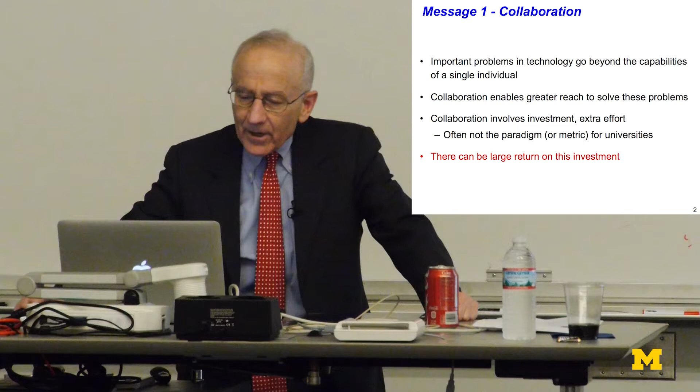So my first message is really about collaboration. Important problems, especially important problems in technology, often go beyond the capabilities of a single individual. So how do you solve these? Well, collaboration. So greater reach, but it's also extra effort, extra overhead. And it's often not the paradigm for universities. You think about monks toiling in their cells, writing individual papers. But even so, there can be a large return on this investment. So that's one message. I'll give you another one.

So who am I and why am I here? Well, I'm a technical person, and if you look at the bottom of these things, there's some equations to prove it. This is obligatory. So here's the Gibbs equation, and it's about enthalpy and entropy. Enthalpy is how much work you do. Entropy is how efficiently you do it. So what does a propulsion engineer or power engineer care about? Both those things. And also vorticity, property of rotation of a fluid, and turbomachines, gas turbine engines, the flows are full of vorticity. So I'm a technical person, but I have some exposure to the organizational literature.

I have, as Dan said, experience in industry and academia, so I've seen it from both sides. I've also had some experiences with failures in collaboration. Not that the technical work wasn't good, but the whole wasn't greater than the sum of the parts. So I've looked at identification of best practices for university-industry collaboration. So that's another theme of my career. Collaboration's been a major part. The mantra, I think, is the whole being greater than the sum of the parts.

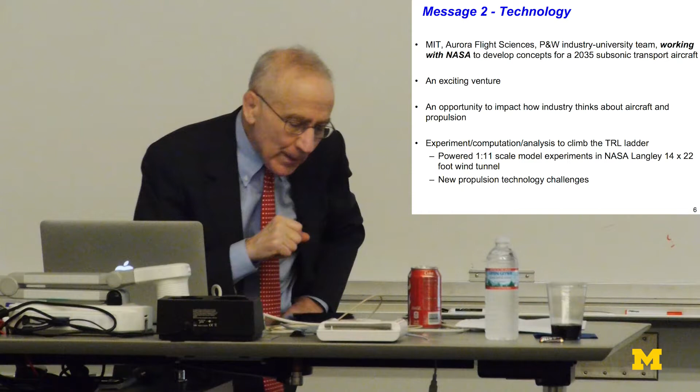And so what I'll tell you about is experiments and computations to climb up the TRL. The TRL stands for technology readiness level. It's how mature the technology is. How are we doing in climbing up that ladder? And also the idea that if you talk about new configurations, new vehicles, new aircraft paradigms, you tend to get new problems to work on, which is also an exciting thing. Okay, so there's the three logos.

Here we are. And what do universities do? Well, they look at concepts, they educate. Industry, you can see aircraft and engine design and development, and they bring to the table product knowledge, things that universities really don't have.

So this is talking about collaboration not only within organizations, but also across organizations. So you can see the numbers here, 30 people, 25 people, and we're now in the third phase of this, so maybe 8 to 10 people so far, among whom are people from the University of Michigan. And I would say that the program is driven by ideas and technical discussions. So it's the primacy of ideas. So it's what's being said rather than who said it. And we're trying to change these legacy beliefs.

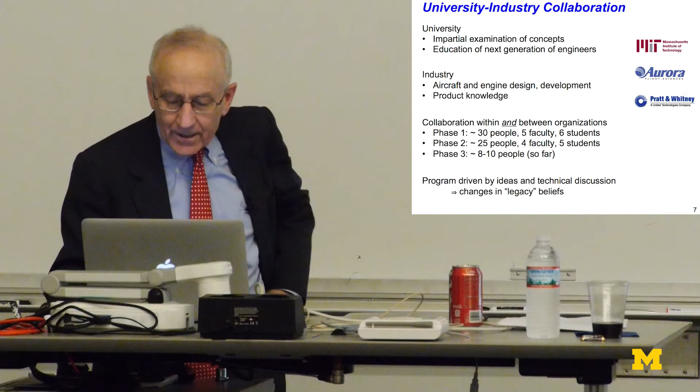Okay, so let me talk a little bit to set the context about the NASA N+3 program. N+3 is generations of air vehicles. So N+1 is the next generation, 10 years. N+2 is maybe 20 years, 25 years. N+3 is further than that. So we're supposed to identify not only the airframes, but airframes and propulsion concepts. What does the air vehicle look like in 2035?

So we started out trying to do this in a strategic way, looking first at the scenarios. What might the scenarios be? So the people at MIT who do that, we banded together with them. Then looking at this, advanced airframe and propulsion concepts and the technology needs. So here's the NASA technology goals. And these technology goals, if you see these NASA slides, they'll have changed. But this was the original back in maybe 2007, something like that. This was our marching orders back then.

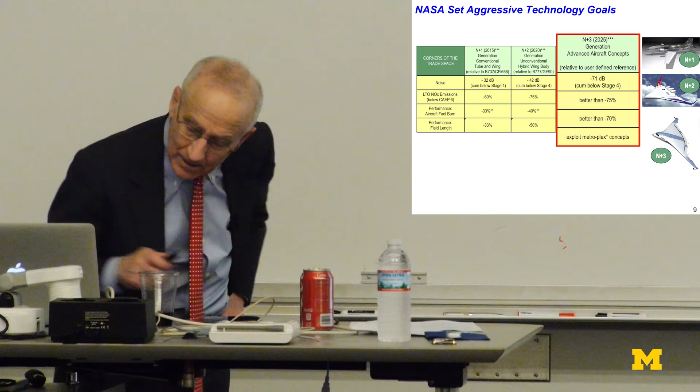NASA said, here are the technology goals. And look at the fuel burn, because that's what I'll focus on. So 70% change in fuel burn. So what that means is basically that's not much more than just flying the fuselage alone. So if you can do that, that's a substantial accomplishment. And here's the NASA charts of what the N+1 is, forward swept wings. That's supposed to be 2015.

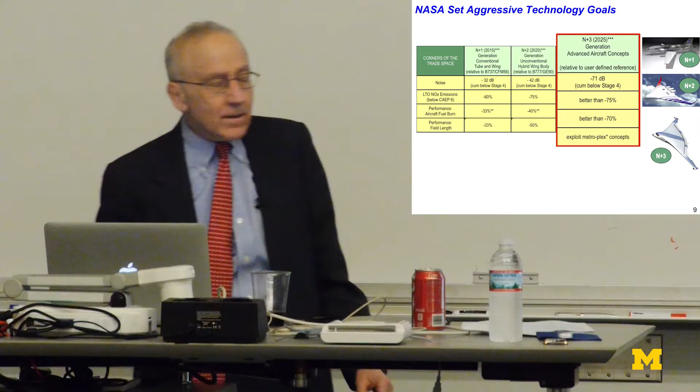Well, 2015, events have overtaken us on that. This is 2020. People are now talking about flight demonstrators for this. Boeing has run their own flight demonstrator. And maybe here's N+3. But ours, well, you'll see what our configuration looks like. But basically, these are stretch goals. And how stretched are they? This is as of 2010.

So let's look at this. Here's the world's data, and here's the NASA goal here. And to give the story away, here's where we, at least conceptually, here's where we think we reach. So how did we get there? What did we do? And where are we going? That's what I'll try to answer.

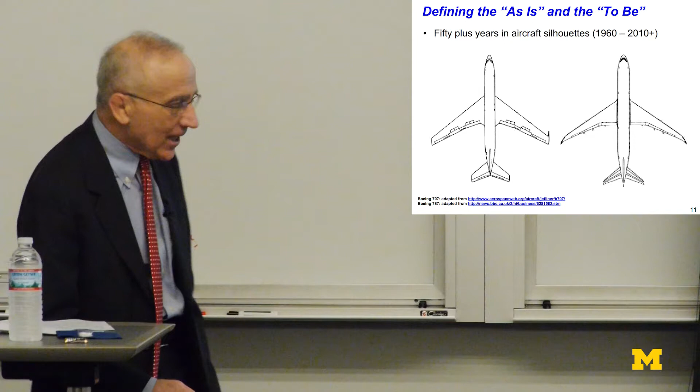Okay, so here's trying to differentiate the as-is and the to-be. Engineers tend not to talk about the as-is. You ask them, how do you do something now? And they don't want to tell you about that. They say, I could do it much better, though, if you would allow me to do this or that. So this is the as-is. So one of these is a 707. One of these is a 787. I'm not going to tell you which. But basically, my eyesight is failing at my age, and I can't really tell the difference between the two.

So this is 50 years plus now. And if we look at this in another 10 years, it's not going to be greatly different. So not much change in aircraft, a lot of change in engines. So we looked at this in our phase one. And what were the major results? Well, we came out with these conceptual designs. I showed you the performance of the design. And this tube and wing configuration with double bubble fuselage.

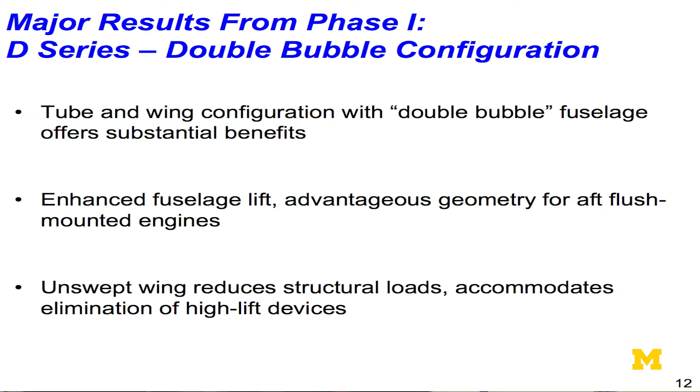Why is it called a double bubble fuselage? Well, I'll show you it's wider, but the fuselage looks like two tubes, so double bubble. It has enhanced lift, and it has advantageous geometry for putting the engines on top and in the back. And that allows you to take in some of the fuselage boundary layer. That gives a propulsion benefit. So that's a real plus. And then you don't have to sweep the wings. We fly a little bit slower, so that also gives you a plus.

So here's what it looks like. Double bubble. You see that here's the two bubbles here. So here's what the aircraft looks like. Here's what it looks like from on top. There's the seating layout. Here's what it looks like in the back. So here are the engines, the two engines. And so the flow goes over the aircraft. That's the whole run of the fuselage boundary layer.

So it's a thick boundary layer. And about 40% goes into the engines.

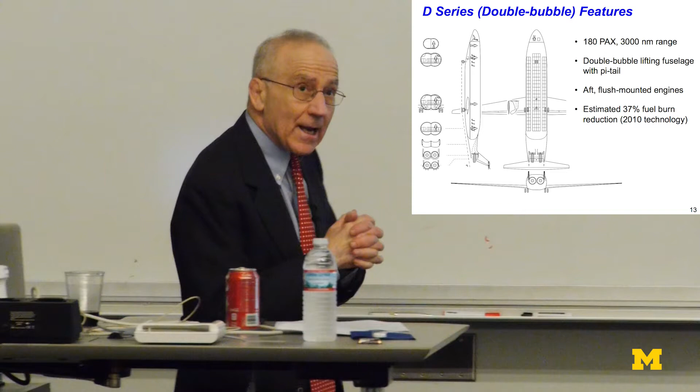For this study, we looked at a number of different variations. One is with 2035 technology. One is allowing the wings, or allowing the aspect ratio, to be as large as aerodynamically desired. That doesn't fit in the gate, so you have to say no, we can't do that because the existing infrastructure won't allow that. So this is with the constraints of existing infrastructure and with 2010 technology.

So this was our phase one. Here's what it looks like compared to a 737.

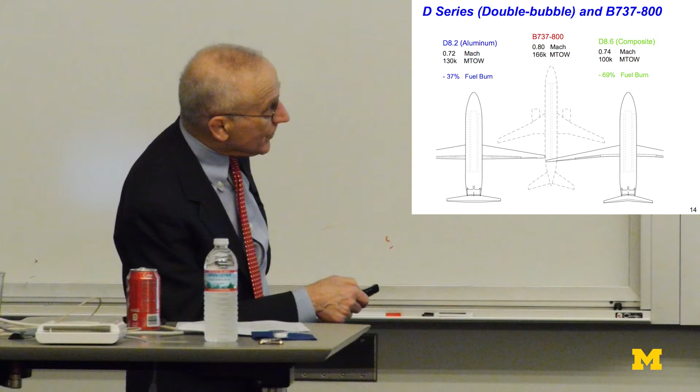So this is the super duper version. Perhaps it's composites, has a much larger wingspan. Takeoff gross weight is less. And this came out to have a 69% fuel burn. The aluminum version flies slow, has a smaller takeoff weight than the 737, and was a 37% fuel burn. But you can see the relative sizes of the 737, or the A320 if that's your preference, and the aircraft we're talking about here.

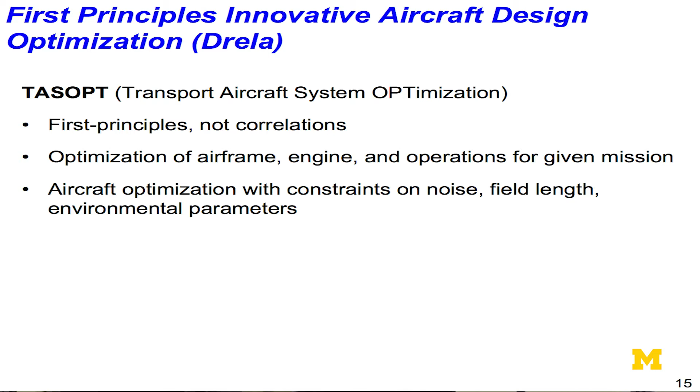And I just have to give my colleague Mark Drela credit, because this wouldn't have been possible without this first principles aircraft design procedure that he put together. It's first principles, so it doesn't rely on correlations, so you can look at new and different, even innovative aircraft, and it allows you to optimize all these things together—airframe, engine, and operations—for a given mission. And then you could put these constraints on.

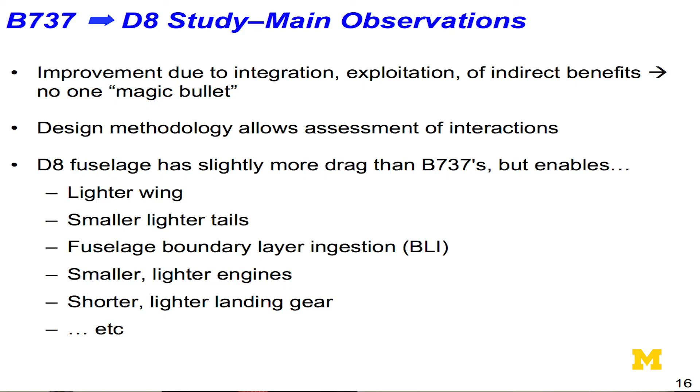So that was sort of the background of it. So our main observations from this phase one are as follows. First of all, what are the improvements due to? Well, there's no silver bullet. You can't say, well, I'll twist the wing a little bit here and I'll get 30% magically. It's like sort of compound interest.

So if you look at this, the fuselage is slightly more drag, but lighter wing. Small wing, the fuselage has more lift, so the wing can be lighter, smaller, lighter tails. Fuselage boundary layer ingestion, taking in the fuselage boundary layer, smaller, lighter engines, etc. It's like compound interest, okay.

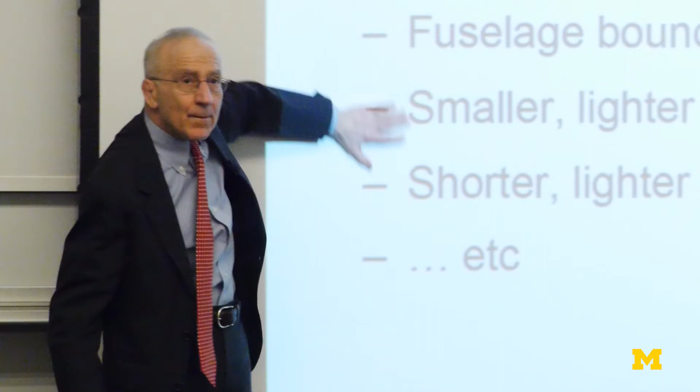And here's another way of saying that. This is a complicated chart, but what it's talking about is this is goodness—goodness on point of noise, fuel burn, field length, whatever it is. To the right is noise. And these are change in configuration, and this is all the advanced technologies.

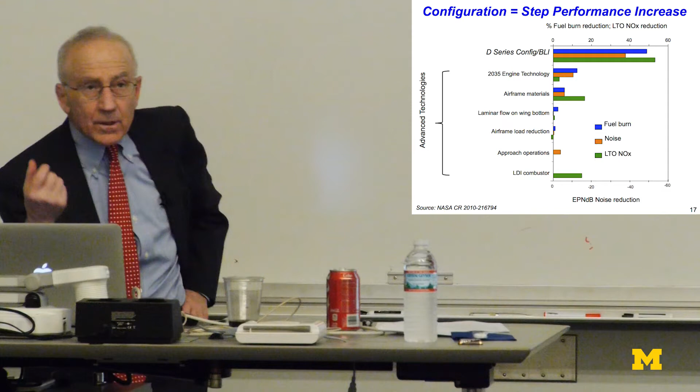So what you see here is, where do the benefits come from? Well, the overwhelming part of the benefits is from configuration change. Yes, you go to 2035 engines. Yes, you go to different types of fuselages, airframe load reduction, etc., different types of combustors. But all those things are much less, even added together, than the configuration change. So that's what I'll be talking about—the configuration change. So that was our phase one.

Phase two, we said, hey, we have this aircraft that ingests boundary layers. People haven't done that for civil aircraft. That's a major issue. So this integration of the airframe and the propulsion system, that's the major unknown. So our phase two, a lot of phase two was focused on that.

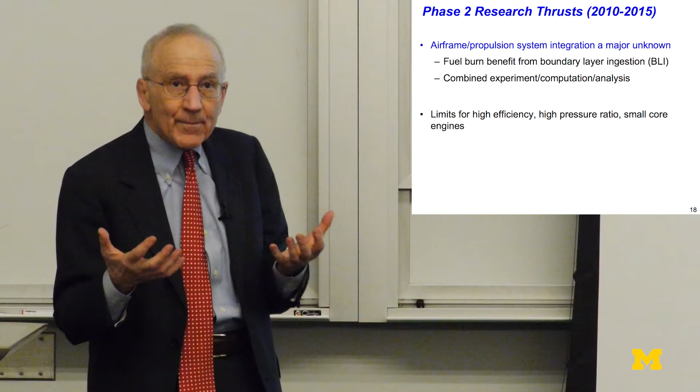What's the fuel burn benefit from boundary layer ingestion? I mean, we could do all the cycle calculations, but if in actuality there are some complicated fluid dynamic effects that debit the benefit, it's not a good idea. So we needed to look at that.

And along with that, we worked with Pratt & Whitney very closely on high efficiency, high pressure ratio, small core engines. Small, that means engines with small gas generators, small compressors, turbines, and combustors that will fit within these new types of aircraft. Let me talk a little bit about this boundary layer ingestion.

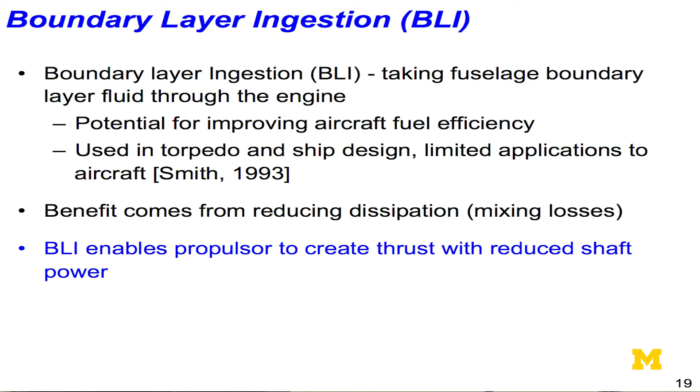So it's the fuselage boundary layer. It's the slow-moving fluid being reduced by viscous effects in the boundary layer. And you take the boundary layer fluid through the engine. So it has the potential for improving aircraft fuel efficiency. And it's been used in torpedoes and ships.

Ship propellers operate in the wake, or in the boundary layer, of the hull. And what does it do? Well, it just enables the propulsor to create the thrust, basically to propel the vehicle with reduced shaft power. So that's the benefit. So how does it actually work?

So think about two different aircraft. One of them has the nacelles and the engine underneath the wing. So what you do is you create a wake, or draft here, a low velocity region. That has to mix out, or that mixes out to the free stream conditions.

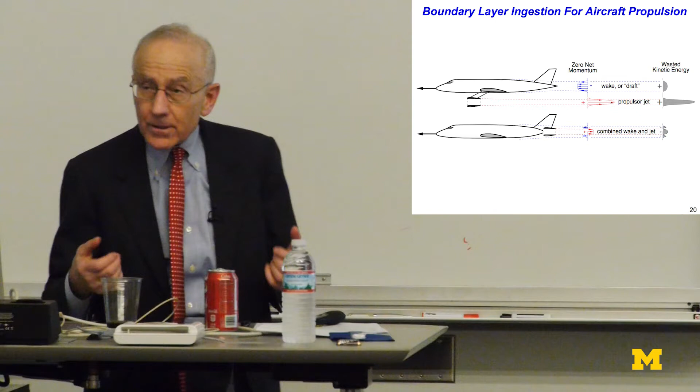Now, what I showed you is a picture of the fuselage boundary layer going through the engines. So you have a situation in which it's difficult to break things up into thrust and drag. Thrust is Pratt & Whitney, drag is Boeing, or drag is Airbus. But it's difficult because the fuselage boundary layer goes through the engine, so it's hard to draw the aerodynamic interference plane. Thrust and drag are ambiguous for these kinds of integrated configurations.

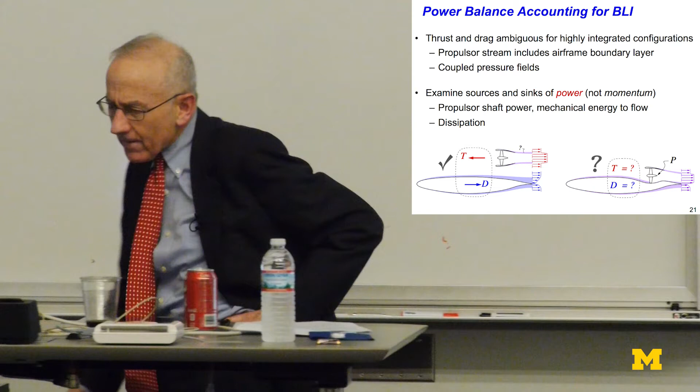And you can see the reason here: the propulsor stream includes the airframe boundary layer. You also have coupled pressure fields from the propulsor and from the airframe. You have those in the conventional case too, but it's much stronger now. So it's hard to make the separation. You have to assume various things.

So instead of working on thrust and drag, instead of working on forces, we now work on sources and sinks of power—again, enthalpy and entropy, sources and sinks of power. Think about the propulsor shaft power, the mechanical energy you have to put into the flow, and the dissipation.

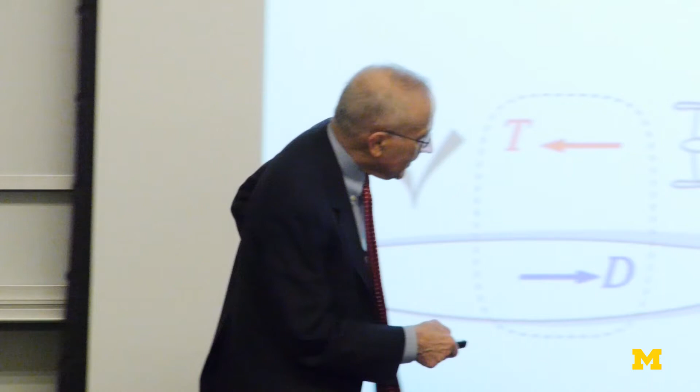So again, conceptually: here, check, we understand thrust, we understand drag. Here, it's difficult to separate thrust from drag, because the force on this is changed by the presence of that, and the behavior of that is changed by the presence of this.

So how do we do that? Well, you work directly with power.

So having said all that, one of the things you have to worry about is that now you have a non-uniform flow. You have the inlet, it looks like this: low velocity on the bottom, free stream velocity on the top. So at design point, at cruise point, you're always in a non-uniform flow.

So the question that comes up immediately is, what about the aeromechanical limits? Forced response, perhaps flutter. What about the decreased fan efficiency? All the things people have had to worry about before with distortion, but they only worried about that at off-design conditions. Now it's with you the whole flight.

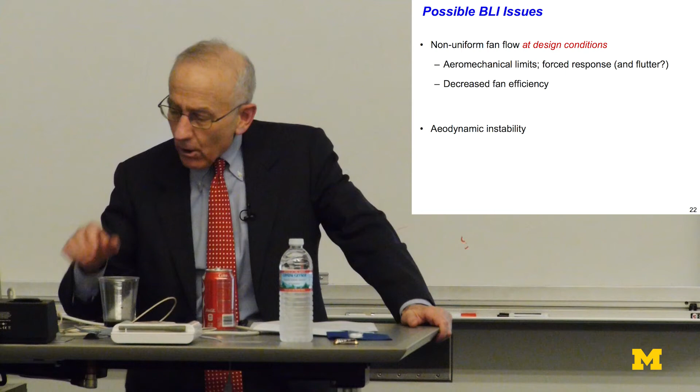Second one is aerodynamic instability here—does it get any worse with this? Well, those are real issues.

So I'm going to talk about the wind tunnel experiments that we carried out. I need to show you this evolution of the wind tunnel experiment. So, the first picture...

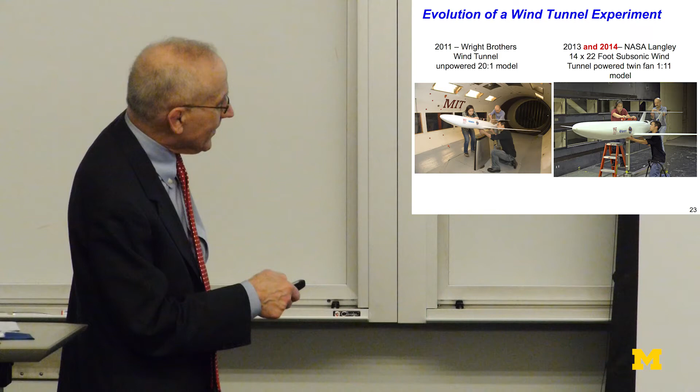I'm sorry to the students who came to talk with me at lunch, this is the same slide I showed them—but here's two students and Professor Drela. This is in the MIT wind tunnel, and here's a 1/20th unpowered model, just a model without any engines. Here's Nina, Michael, and Professor Drela in 2011, then 2013, and again in 2014 we went to one of the national facilities, NASA Langley's 14 by 22-foot tunnel, and here are the same guys.

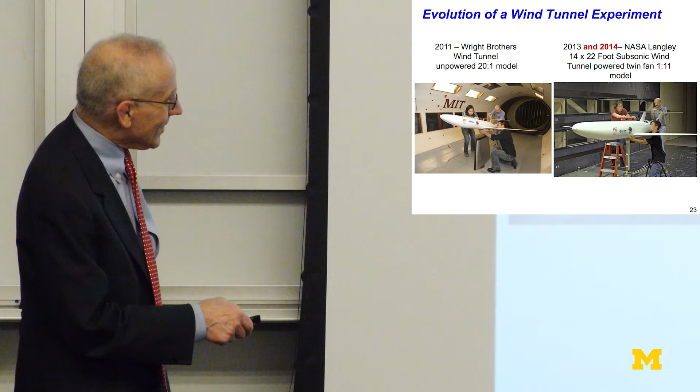When this photo was taken, we didn't set it up, especially didn't pick the day—it just happened to be the day the NASA photographers were around. But you'll notice, and I'll deny I said this, Professor Drela seems to have the same outfit on, Michael Lieu seems to have the same outfit on. Nina, of course, is sartorially correct.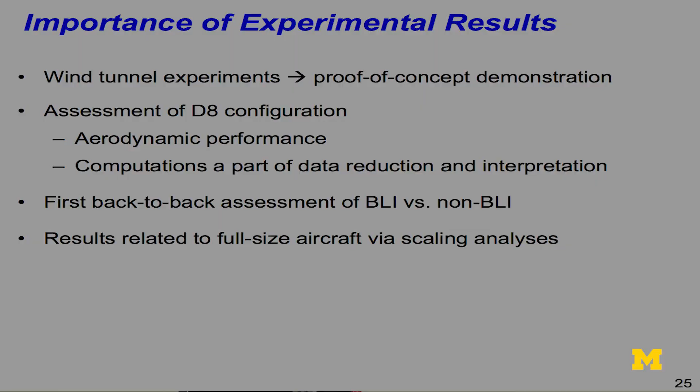So aerodynamic performance, and to do this, the computations which were done in collaboration with NASA Ames were an important part of this. So it's a back-to-back assessment of boundary layer ingestion versus non-boundary layer ingestion. That's what this is about.

It's a boundary layer ingestion experiment, and we can relate the results to full scale using scaling analysis. So we did this at a low Mach number. Now the real thing's going to fly at a transonic Mach number, 0.72, 0.74. But the boundary layer ingestion itself is not Mach number sensitive. The benefit is an improvement in something called the propulsive efficiency.

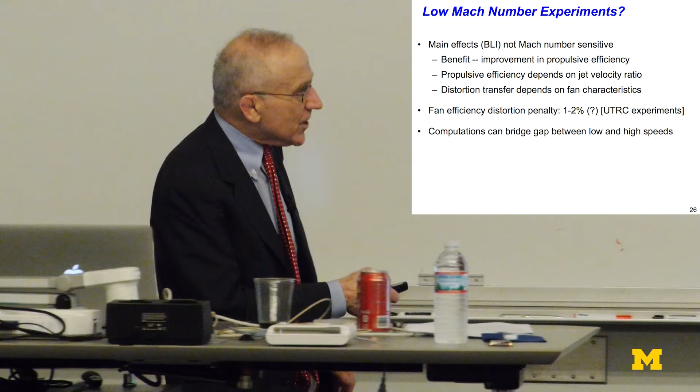And again, that's about less exit kinetic energy dumped into the air. It's not a Mach number sensitive thing. It depends on the jet velocity ratio, the jet velocity. This depends on what the fan characteristics look like, the fan slope of pressure rise versus flow. And neither of those things are very Mach number dependent.

And yes, there's a distortion penalty, but the measurements that have been taken so far show that maybe it's 1 to 2%. So if we gain 6, 7, 8, 10% by boundary layer ingestion, even though we might take a hit in fan efficiency, and I don't believe we have to if we design our fans properly, we're still ahead.

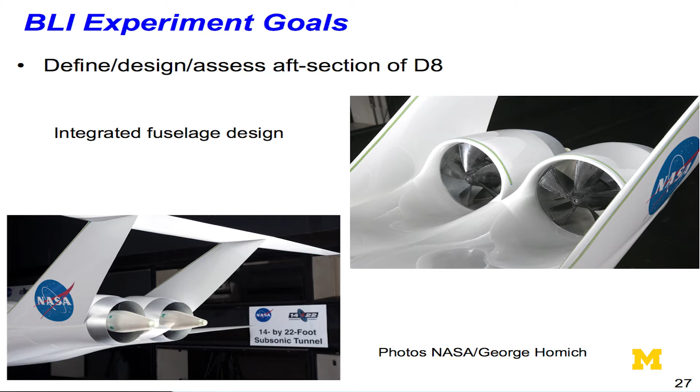Okay, so we're trying to assess—we developed this back end with an integrated fuselage. So you see here are the inlets. The fuselage blends into that. Here's what it looks like from the back. This is as installed in the tunnel.

And what we're trying to do, again, back to what our overall goals were: quantify the aerodynamic behavior of the boundary layers, develop a methodology which didn't really exist. How do you assess the benefit of an aircraft with boundary layer ingestion? How do you do the comparison? Do you do it at constant engine area? Do you do it at constant mass flow? Do you do it at constant exit velocity? So thinking about that in a rigorous way was also an important part of this task.

And what we're then trying to do is to define—okay, we do this conceptually, we say yes, there's a benefit. What are the steps maybe on the way to a flight demonstrator? Something like that. Again, it's moving up the technology readiness ladder.

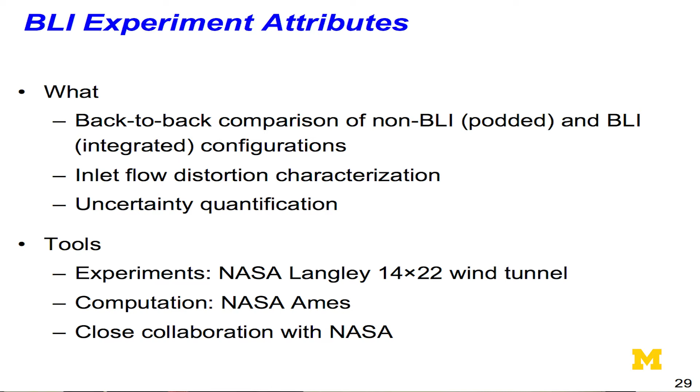So back-to-back comparison of boundary layer and non-boundary layer ingestion—I'm just saying it over and over again because that was really uppermost in our thoughts. That's the first thing: inlet flow distortion. What comes into the inlet? What do you have to be worried about in this type of configuration? And also, uncertainty quantification. I'll talk to you about that.

And so experiments, computation, and it was very close collaboration with NASA. It was a real pleasure to work in the NASA Langley tunnel. The people were just excellent. The facility was excellent. There was a really great spirit of teaming.

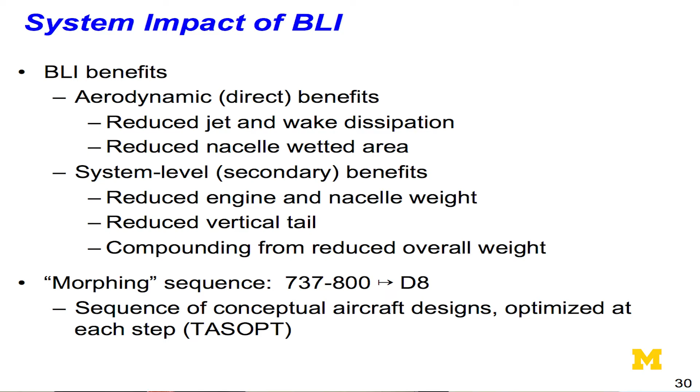Okay, now I've been talking up to now about the aerodynamic benefits. But there are also system benefits. You can say the aerodynamic benefits are direct benefit—here's what I measure: propulsive efficiency, things that you talk about in an undergraduate course on propulsion. So those are the aerodynamic things. Jet and wake dissipation, maybe the nacelles are only half nacelles, so you have reduced area.

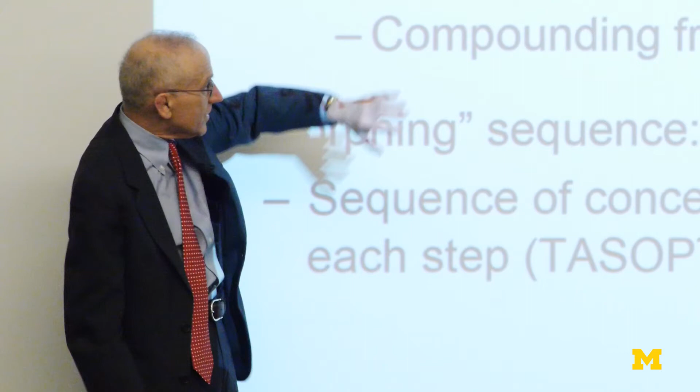But there are also secondary benefits. Maybe you don't need a pylon because the engines are now mounted on the fuselage. They're very close to the vertical tail, and again, reduced weight.

So I'll show you what that looks like—at least I would show you if this thing didn't keep coming back—in a morphing sequence. And in this morphing sequence, we'll use this TASOPT program, which optimizes aircraft to go in steps from a 737 to one of these D8 configurations.

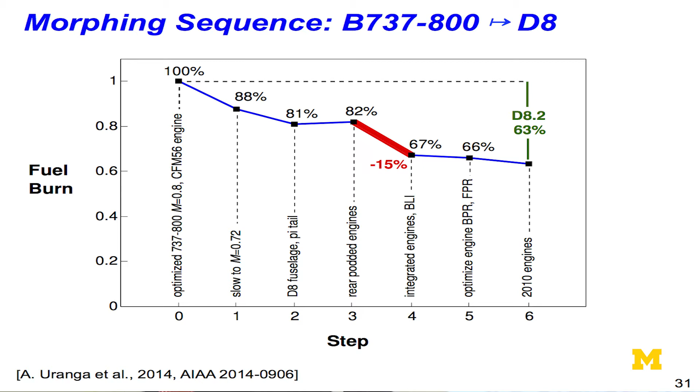So here's what it looks like, and this is fuel burn. So here's a 737, Mach 0.8, with a CFM56 engine. That's the engine that's on all those aircraft. And then you slow it down. You go to here.

You have the D8 design with a pi tail. The engine's still underneath the wing. Then you have rear-podded engines here. The engines are now on the fuselage, on the sides of the fuselage. And then you do the

podded engines. Now you do the boundary layer ingestion. That's the step we're talking about. So 15%. And then you do a couple more things.

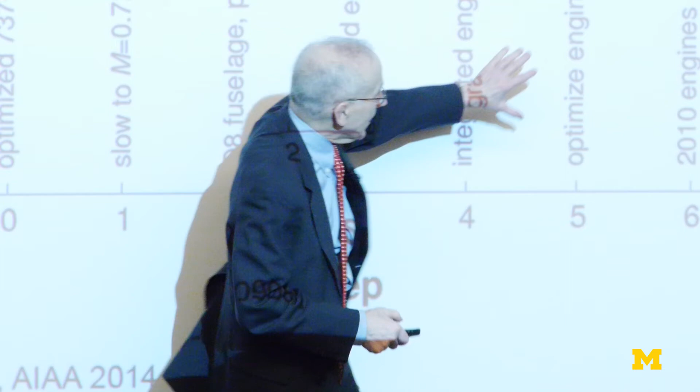Get to 2010 technology. We started off with earlier technology. And that gets you to this 37%. So you can see the different steps. And at each step here, the aircraft is optimized.

So at least according to our estimate, this is the best you could do, best you could do, best you could do, marching toward the D8. But you now see where the benefits come from. Okay, so one other equation is that what's the metric? So the savings in the boundary layer benefit is savings in mechanical energy.

And the metric, the thing that you measure, is the stagnation pressure. So this is stagnation pressure minus some reference value, and it's times the velocity. It's the flux of stagnation pressure. It means the flux of mechanical energy.

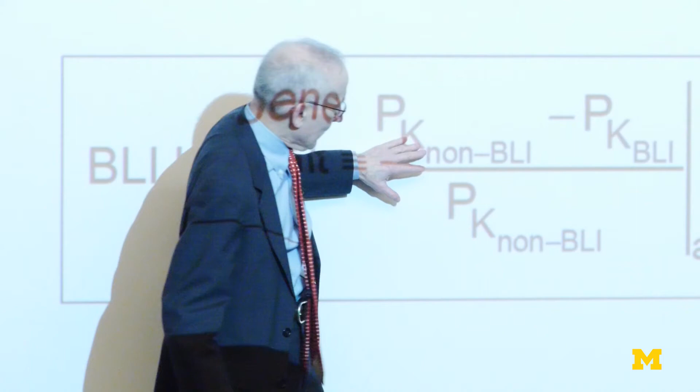So we have this PK thing, and the benefit is PK, the power into the flow, minus the power for non-boundary layer ingesting versus boundary layer ingestion, divided by the PK for the non-boundary layer ingestion. And it's at a given force.

Well, what force would that be? Because I said thrust is ambiguous, drag is ambiguous, but one thing isn't ambiguous, and that's at the cruise condition. You're cruising along in level flight. There's no force on the aircraft plus the propulsor. It's cruising along.

Velocity is not changing with time. F equals ma, so a is equal to 0, so F is equal to 0. Okay, so the force we're looking at is the cruise condition. That's the most important condition.

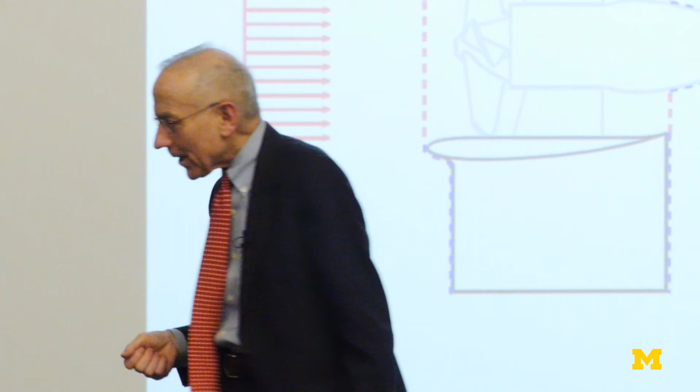Okay, so what we're trying to do is to measure the power at one condition versus the power at another condition. So I used to teach the undergraduate projects course. We tell them when you do an experiment, it's not a really good thing to take two big numbers and subtract them to get another small number, right? The experimental uncertainty tends to increase that way.

So that's what we're trying to do here, but we're forced into it by circumstances. So what we thought we would do is to try to get this measurement in two different ways. One we'll call direct, and one we'll call indirect. The direct method is to integrate over all the streams, upstream and downstream of the propulsor. So we have various rakes in the flow. Here's the podded configuration, nothing in front of it.

Here's the boundary layer configuration, where the flow has a non-uniformity in front of it. And we're going to integrate to find what the mechanical energy is. The second way is

we can measure very readily the electrical power going into the, well, that leaves the controller. And then we can do other experiments to find out the motor efficiency and the fan efficiency, so we can get, through supporting experiments, get what the mechanical power is. So this is a different way. It's indirect. We have to do experiments back at MIT, take the stuff back to MIT, and test the fans by themselves. But these are two ways to measure the same thing, and they got pretty much the same answer.

One came out 10, one came out 11, something like that. But they were very close. So here's the experiments now.

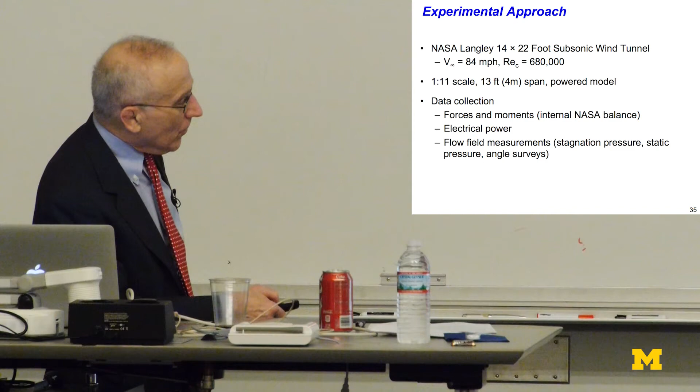Talk about those. This is not as fast as the tunnel goes, faster than that, but basically the model couldn't take it. So we had to put on various turbulence promoters. And here's the data collection force. All these things came from the NASA balances, the electrical power, and all the flow measurements we did.

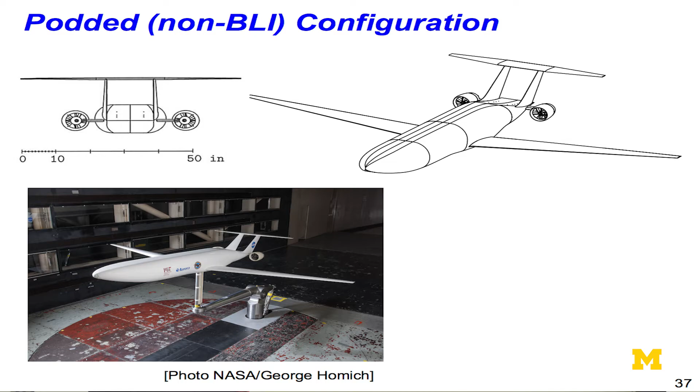configuration, or the non-boundary layer configuration, has engines on the side. Okay, see them here? This is what it looks like, and that's the scale. And then finally, what we call the integrated, or the boundary layer configuration, now has the engines, or has the propulsors, on the top of the fuselage. So again, it was the last piece of this fuselage, but the propulsors, the actual propulsors, the fans, were the same device.

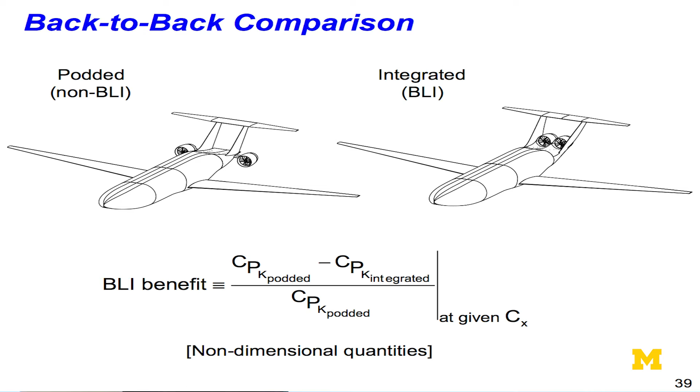So we wanted to get things as close as possible so that all the differences that we had to resolve would be small. So here's the back-to-back comparison that I'll show you. Podded versus integrated, and we write things non-dimensionally, but it's basically a coefficient for the podded, the non-boundary layer power, the boundary layer power divided by the non-boundary layer power at a given.

I tried very hard to get people to use what I considered rational notation, FH being the horizontal force. But there were some really dyed-in-the-wool aircraft guys, and they wouldn't allow me to change the notation at all, even though to turbomachinery people, this means the axial velocity. So I have to say that's one I did not win. If there's any confusion in nomenclature, tell me about it, and I'll relay it to my colleagues at MIT.

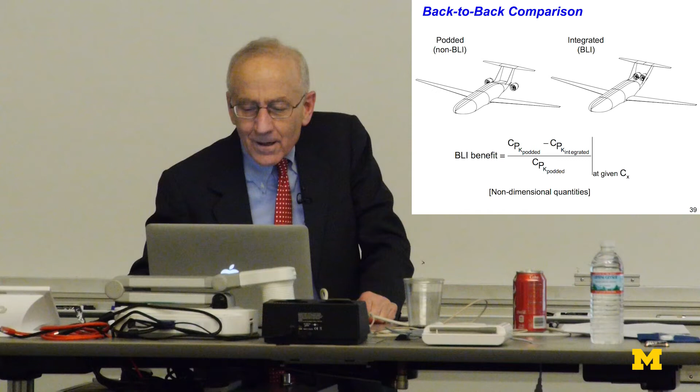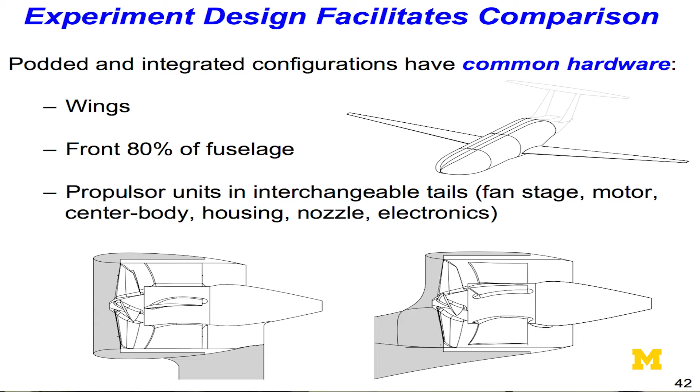Again, the experiment design was set up to facilitate comparison. So the front 80% of the fuselage propulsor units were interchangeable. I'll show you three data charts.

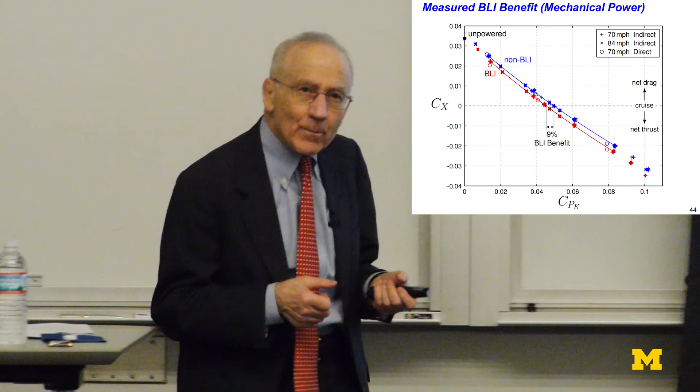Here's the measured benefit. What I plotted here is force versus power coefficient. So power is along that axis, force is along here, and what you see, there's a lot of data on it because all this just took us a long time - the students hand in their thesis with enormous chapters on how difficult the experiment was. So I'm showing you how difficult this is. Allow me my one agony slide here.

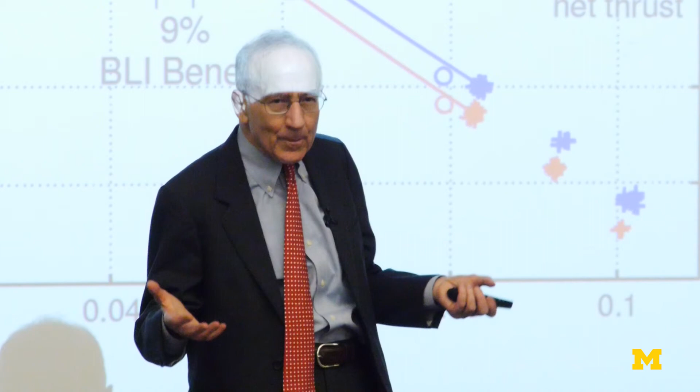So this is non-BLI and this is BLI, and the data is really quite consistent. It repeated from year to year. We tried to make it on different conditions. Once we came back from lunch and a car had plowed into the wind tunnel. It was sitting there with a crumpled fender. Now what was it doing on the NASA gravel? I have no idea.

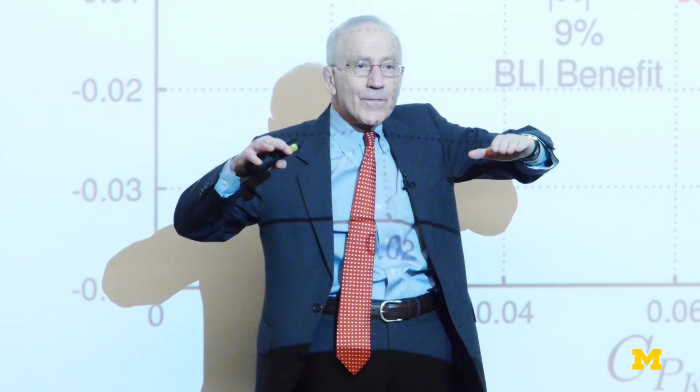But even after the car, things didn't change. So here's about a 9% benefit. Now this is the horizontal force, the X force, and at cruise that's equal to 0. The balance measures nothing - this thing is going through the air, no net force on it. Thrust and drag are equal if you talk about a podded configuration. So what I've done here is expanded the scale for the cruise conditions, cruise mechanical power.

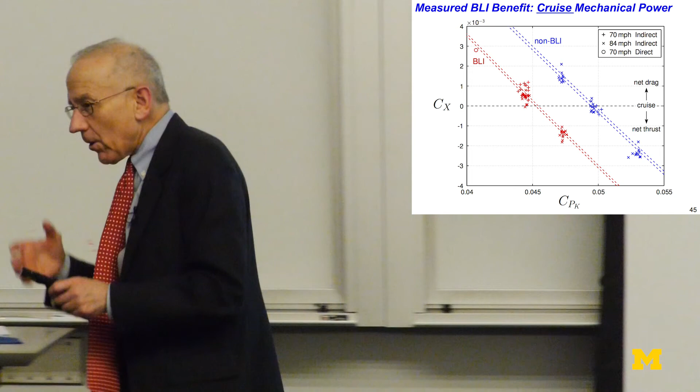So this is the same as before, but it's much expanded, and so you can see the behavior around cruise. You can see the repeat data - 70, 84, 70 miles an hour, direct, indirect. All the stuff seems to plot together. So we got about a 9% benefit.

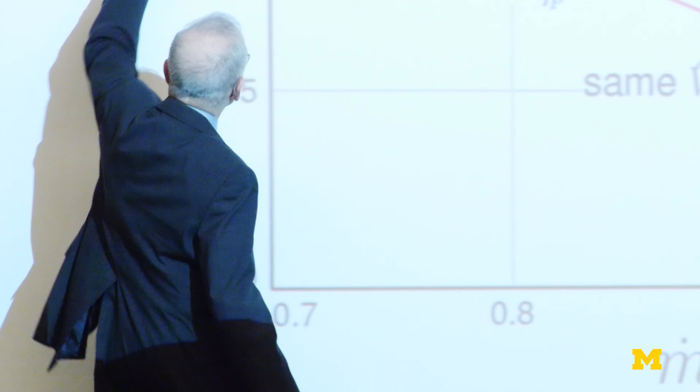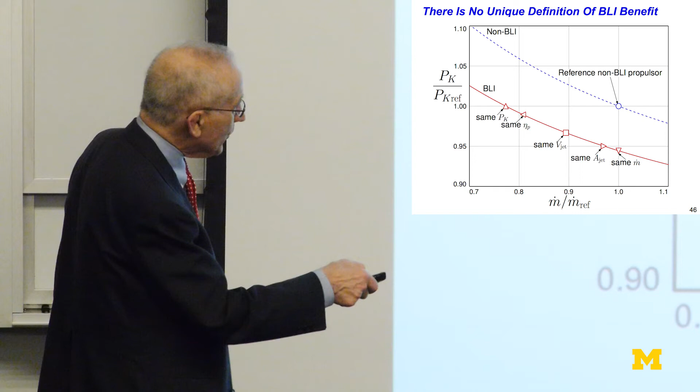This is the power. And at the same mass flow, you get a little over - well, that's the benefit. This is the estimated benefit you get, 6%, 7%. At the same area, you get less. At the same jet velocity, you get less. If you have the same power, you get the same number because you're comparing power. But basically, you can take the benefit out any way you want.

That's a design-specific question. But at least we have now the tools and the understanding, the thinking, the rationalization to do this comparison. And here's just a shot of the inlet rakes and some of the instrumentation.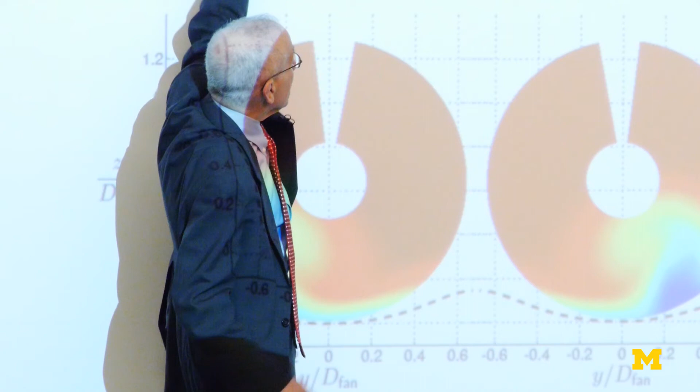Okay, so what you see is low velocity stuff on the bottom and higher velocity stuff on the top. This is all free stream fluid here. This stuff comes from the boundary layer, slow moving fluid, low stagnation pressure. And there's a plot of what it looks like. Okay, so it's a very benign non-uniformity.

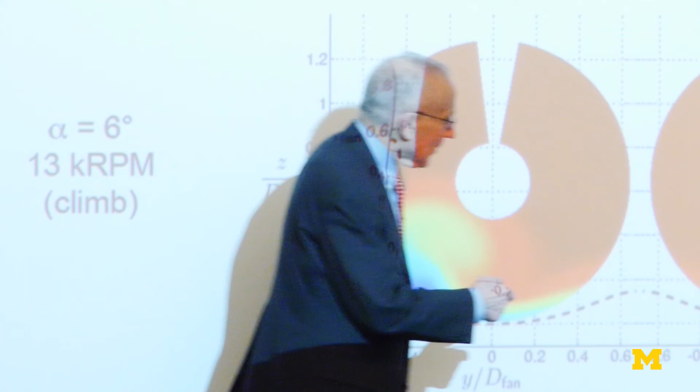At higher angle of attack, what you see is something that looks very much like vortices, right? I had vortices in my earlier slide, but the flow is swirling around here because the flow that comes into the boundary layer, into the engine, gets acted upon by the pressure field of the engine, and you have a non-uniform flow which is diverted in a pressure gradient, leading to streamwise circulation here, and thus you have a vortex coming into the engine.

So this non-uniformity is something that needs further investigations. We didn't really think about this before the experiments, but this is an interesting offshoot. Okay, and this is just experiment and computation. The computations work at the level of comparison that we're making. The computations work quite well.

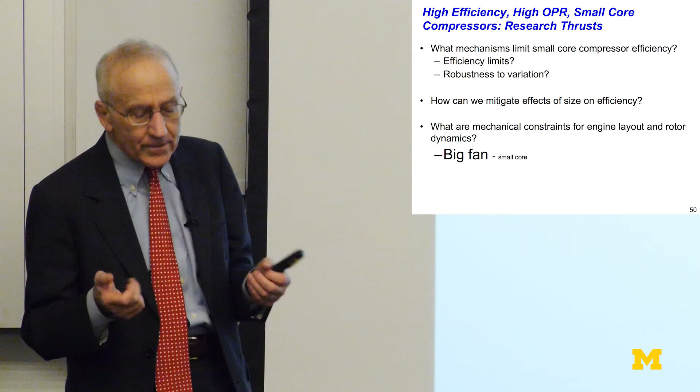So I want to spend a little bit of time now on the second part, which I really didn't give its proper due. High OPR, high overall pressure ratio, high efficiency small core compressors. So if you take a compressor and you shrink it, you Photoshop it, the efficiency falls off really severely. And that's because not everything scales. The blades scale with radius, but the clearances, and so if you make everything smaller and smaller and smaller, the clearances don't get smaller. So efficiency limits and robustness to making the blades are like half the size of a dime.

So part of the program was to look at this. How do you mitigate those effects? In other words, it does you no good to do boundary layer ingestion on this wonderful aircraft if the compressors are going to lose efficiency. And it's a mechanical issue also. You now have big fans. The fans are getting larger and larger and larger, and the cores, the part the hot stuff goes through, are getting smaller and smaller and smaller. How do you deal with that?

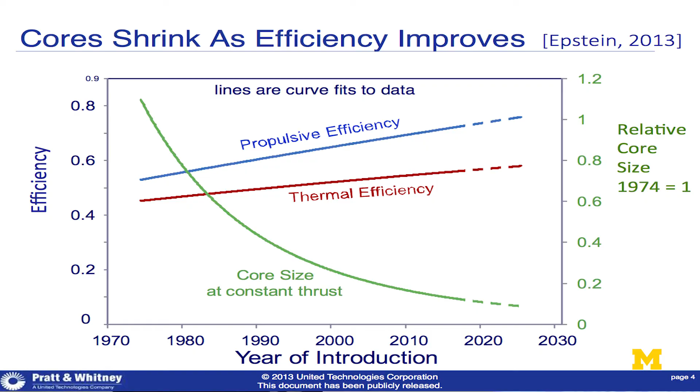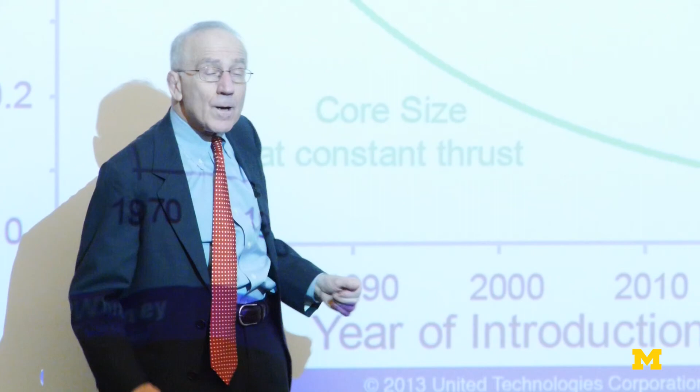So here's some charts from my colleague Alan Epstein. I think he probably showed these in 2013. But here's efficiency versus year of introduction, and here's core size. So core size is basically mass flow through the core. So you can think of it as core area, because the density is roughly the same. Core area is shrinking. The propulsive efficiency is going up because the bypass ratio is going up. The thermal efficiency is going up because the pressure ratio is going up. But it's this trend that you're really worried about. So this is the Pratt and Whitney view of the universe.

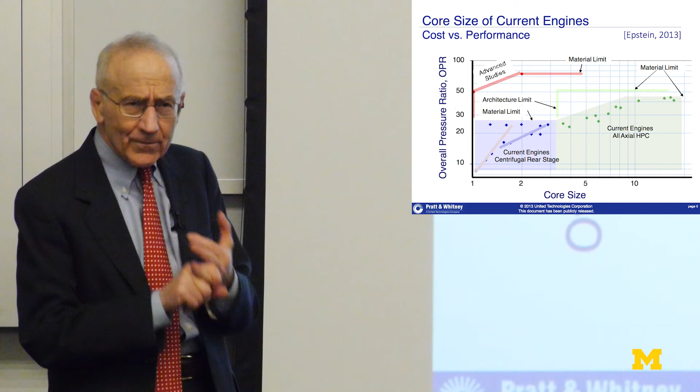And here's just another way to look at it. Core size. Current 737 engines are here, about 7. That's what a CFM56 is. So we're talking about going to 1.5, basically. And we're also increasing the pressure ratio. So we're talking about being up here, where it says advanced studies. Well, the thermodynamics is pretty clear about what that means. The thermodynamics is unequivocal. It's also unforgiving, right? So you have to get things right from point of view of component efficiency and from point of view of mechanical living in this environment.

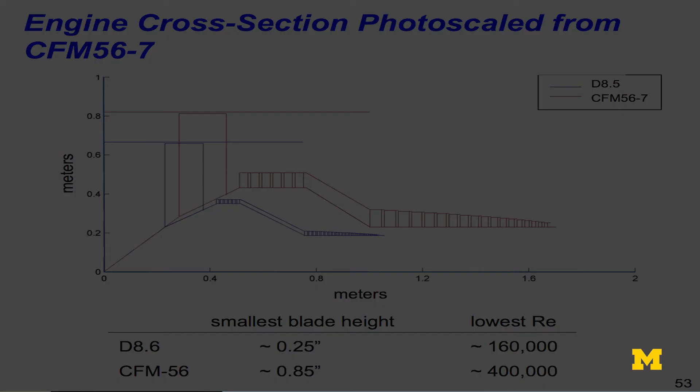Okay, so here, just to show the problem in a different way, here's a photo scale of a CFM56 and of a D8.5 engine. So the fan is not much smaller. The bypass ratio, which is the mass flow going through the fan part to the mass flow going through this core part, is a factor of 2 or more larger. And you can see the many stages, higher pressure ratio, and you can see it's getting really small in the last few stages. Means things like clearances get really important.

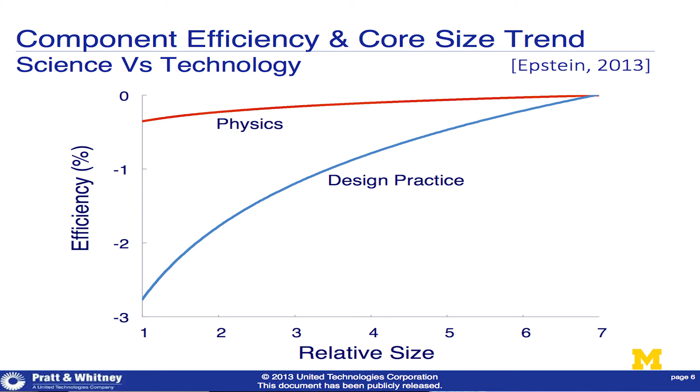Leakages get really important. And so you're in a situation, and again, I'll defer to my colleague, where design practice says this. Here's relative size, and here's the area we want to be in. And the efficiency is starting to dive off. But there's nothing that says, from a fluid dynamic point of view, the Reynolds numbers change a little bit, there's nothing that says, from a fluid dynamic point of view, that you can't do this. So that's what he means, physics versus design practice.

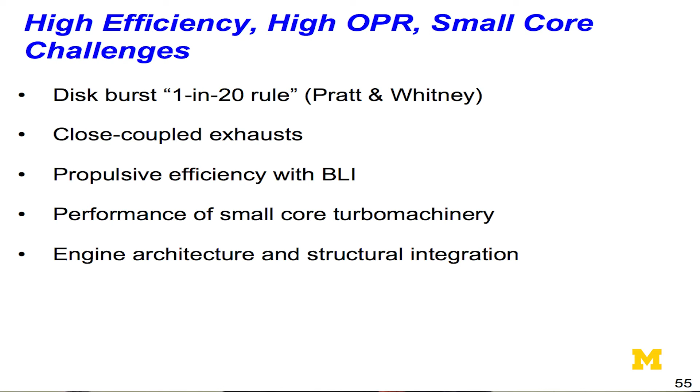Okay, so there are challenges, and this is another thing. There are challenges in these high-efficiency, small-core engines. One of the challenges is something called the 1 in 20 rule. Anybody here would know what the 1 in 20 rule is?

This is an FAA rule. It says that if a turbine disk bursts, you can't contain the turbine disk. There's too much kinetic energy. You can contain fan blades, but not the turbine disks. If a turbine disk bursts, I think they tend to break up into 3 big chunks. That happens very infrequently, but it has to be less than a 1 in 20 chance of taking out either the other engine or some flight critical part of the aircraft.

So how do you do that? Because our engines are really close to one another. If you do, it's just sort of the subtended angle. It's more than 1 in 20. So the Pratt guys worked really hard on configuring the engines, and they created a new and innovative geometry. There's a SciTech paper about it, which I can give you the reference if you email me. And they actually obeyed this 1 in 20 rule.

So we have that. We have close-coupled exhausts. We have propulsive efficiency with boundary layers. And more so, the biggest one is performance of small-core turbomachinery. What's that performance going to be like? And taking a step back, what's the engine architecture going to be like for these small cores? You can't fit the low-pressure shaft through the small core, so it has to be different than all current engines. But you can look at this in the paper.

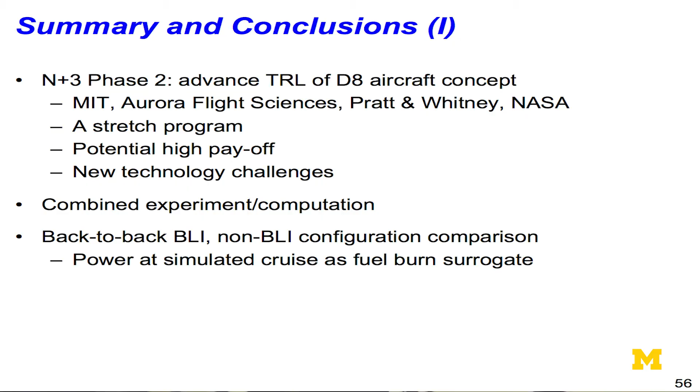So I have a couple of conclusions now. So what did we start out to do? Address impact of BLI and advance the technology readiness level. So it's the 3 partners plus NASA. This was a real stretch program, I thought. At the beginning of it, I was just hoping that we would be able to go into the NASA tunnel and not embarrass ourselves. But it came out really well. So I thought it was great. High payoff, new technology challenges.

And what's come out of this is that if you look at a different product, you now have different things to work on. And that's a point that Epstein made in his Dryden lecture, which I thought he gave here. So the problems you're starting to look at now are different. They're new and exciting, and that's always good news for an academic. So back-to-back comparison. And again, power at simulated cruise as a fuel burn surrogate.

Okay, so what else did we do? Well, 15% system-level fuel burn savings. Our measured behavior was about 9%. We, as I said, measured with 2 different techniques. And so we think that this is really strong support for boundary layer ingestion, not only for the D8, but boundary layer ingestion for maybe different configurations for civil transport. So where are we going? My last chart.

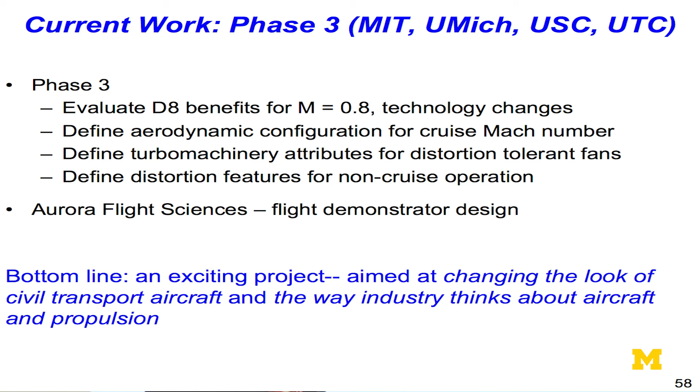Well, it's now MIT, University of Michigan, USC, and UTC. Why USC? Well, one of the research engineers is now a professor at USC. UTC is United Technologies, and University of Michigan, Professor Martins is also working with us, and I was pleased to meet him for the first time today. So what are we trying to do now? Well, it was low speed calculations, trying to evaluate the benefits at high speed, define the configuration for cruise Mach number. What turbomachinery attributes do you need for these distortion-tolerant fans? And what are the features? What does distortion mean?

And also, separate program, Aurora is now working on the design of a possible flight demonstrator. Don't know if this is going to happen, but they're working on the design. And so here's the bottom line. It really is the bottom line. I think the students and the other faculty, we really thought this was an exciting project. And again, we're trying to change the look of civil transport aircraft. It's about time, isn't it? And the way industry thinks about aircraft and also propulsion.

So with that, let me just acknowledge NASA program, team members, our partners, Harold Youngren, the staff at NASA Langley, they were super, and the NASA project management who were with us through thick and thin. And I have to give them a lot of credit also for having faith in us. So thank you very much, and I'll be glad to take any questions.